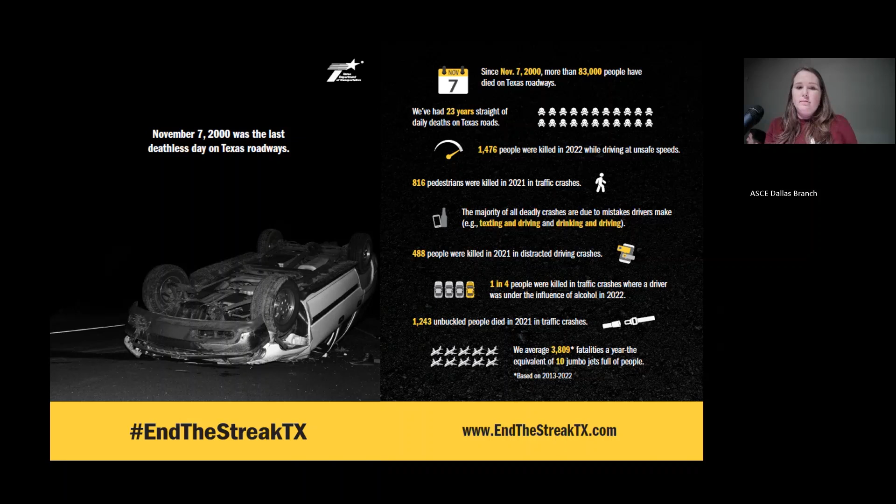So there is one person coming to our North Texas region every 3.3 minutes. So if you can imagine, this region and the area that the Dallas district covers grows substantially by the minute. So we want to make sure that we're managing all of our projects accordingly. We're getting those roads built up to handle that boost in population. Next slide.

So in the Dallas district, we have 7 different counties that we manage here at the district. We have over 900 employees, and that accounts for 11,000 lane miles of state maintained highways. So that's a lot of work to do. And that's a lot of traveled roadways that we have to not only design and construct, but we also have to maintain. Next slide.

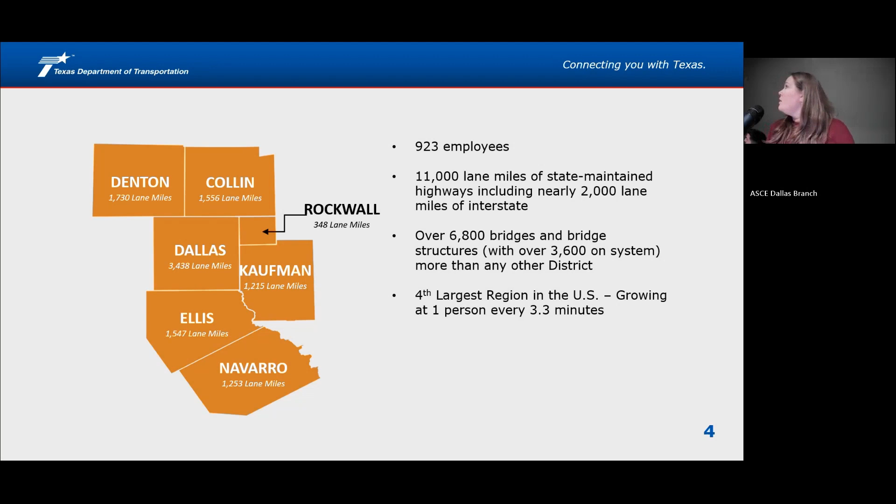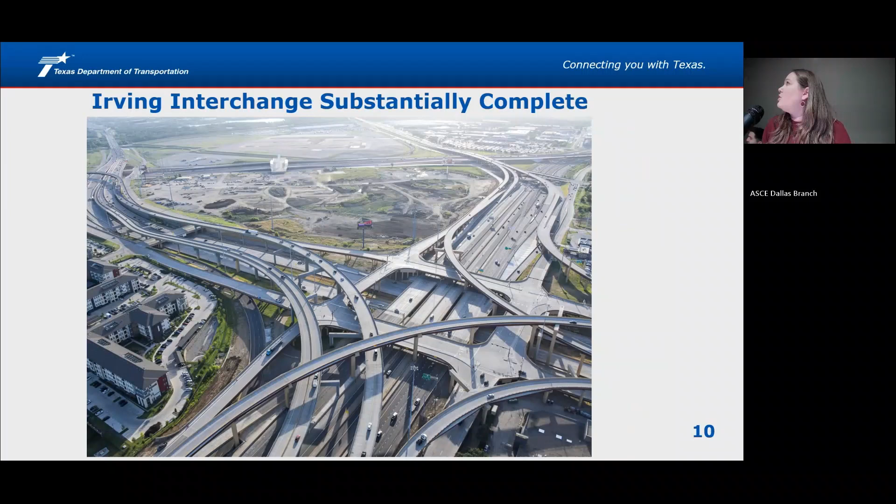We have the LBJ East project. That one's still under construction. So if you're driving down 635, you still have some construction underneath you, but we should be complete in later 25. We have the Skillman Bridge that gets built with that project. So everyone's been watching that construction going. It's been very interesting to see that bridge go up. But lots of lane miles along 635 are getting rebuilt, and we're very happy to see this one get finished soon. Next slide.

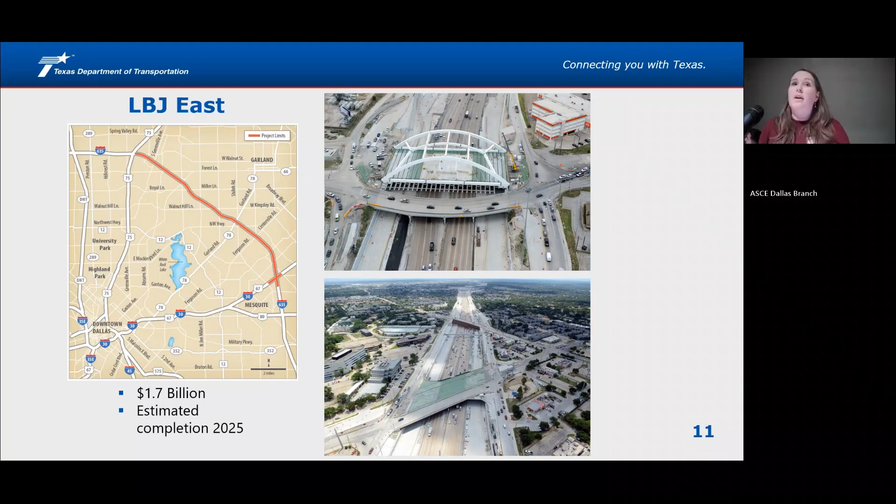We also have I-35E Phase 2 that's under construction up on the 35E corridor in Dallas County. That was a $709 million project. Construction is ongoing. We have a few more years on that one, but you'll see lots of construction going to rebuild the main lanes there, add capacity, and also rebuild those managed lanes there. Next slide.

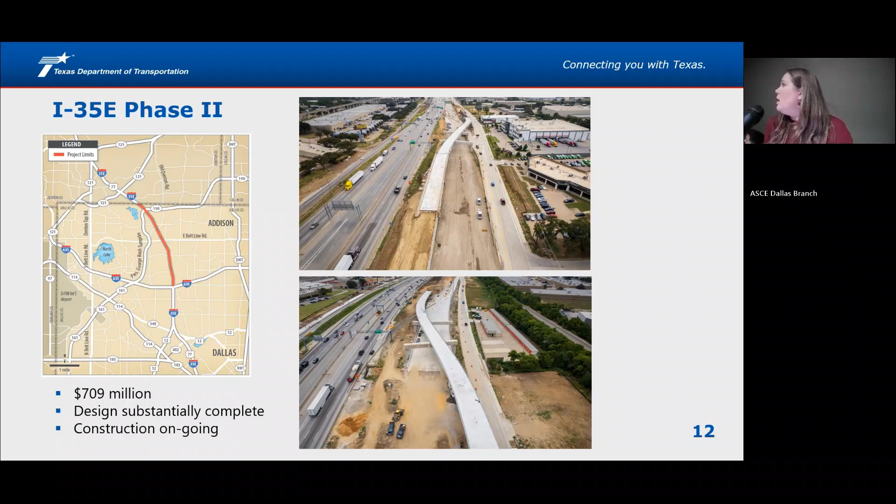SM Wright Phase 2. Construction almost complete on this one. Most everything is almost done. This is down off 45 south of Dallas. And you'll see that it is almost done. It was about a $79 million project, a really cool project, and we're happy that this one is almost complete. Next slide.

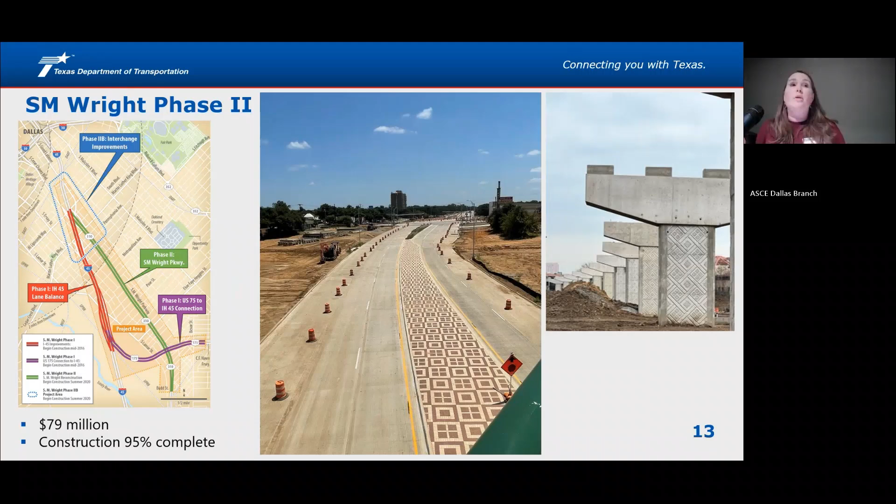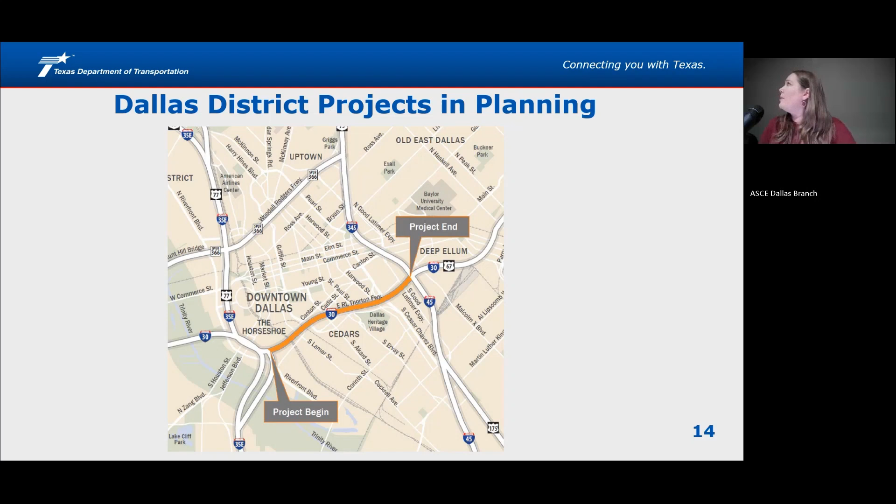So some of our projects that are still in planning phase, so still in the phase before we go to construction, if you want to go to the next slide. So if you are a consultant working for TxDOT, you're probably working on the US 380 corridor. We have broken this project up into multiple segments, and we are delivering it in PS&E. So we have finished all the schematics on the 380 corridor. We split it up into 5 different schematics. All 5 are cleared right now. 2 were EISs. They were both cleared in 2023.

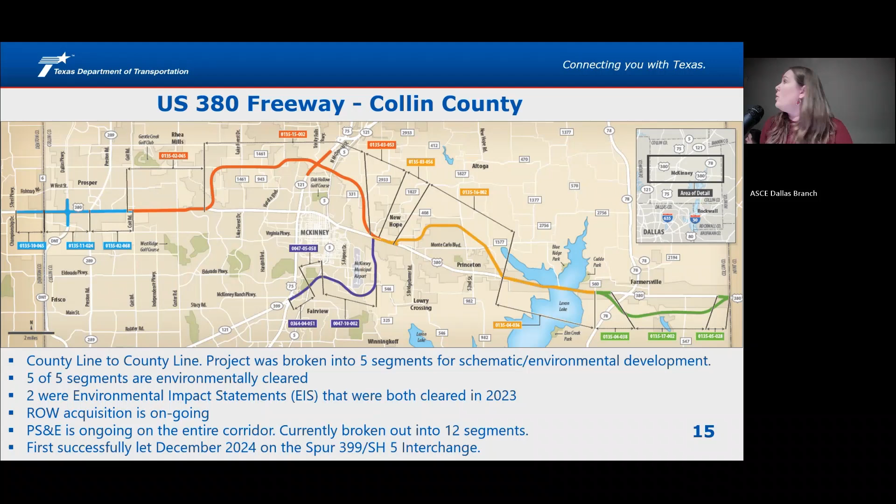Next slide. So we also are working on I-30 East Corridor in Dallas County. So this is the segment that goes from Canyon all the way to 635. We're prioritizing a piece that goes from the Canyon to Ferguson. This schematic is nearly complete, and the environmental is almost cleared.

So this one is a project that we've been working on for quite a while, but we are just in the planning phase right now. We started acquiring a little bit of right of way, but you'll see in here in a minute that we talk about the 345 project that might be leapfrogging this one in the delivery.

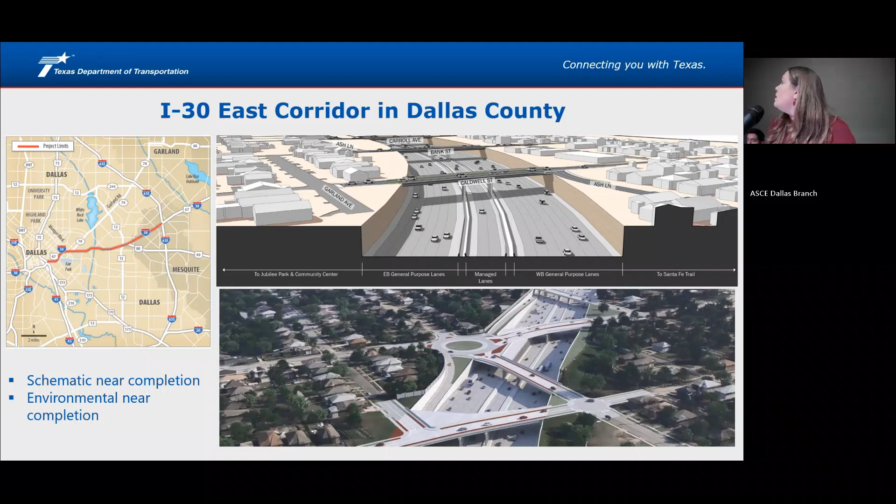Next slide. So our 345 project right now is we just held the public hearing. We held it in April. So we are working to get this project environmentally cleared in October. This one's a very important project. It rebuilds the 30 interchange at 345 and then goes all the way up to Spur 366.

We are reconstructing, I think the next slide shows a section. We're reconstructing the existing bridges that are there today and building it in a trench. So rebuilding the main lanes below, making the cross streets continue over in order to improve the operations there, as well as replace those aging bridges. I think on the next slide we have a picture.

Yeah. So here's just an image of what 345 can look like after we get finished with the project. So like I said, you'll see that 345 has been rebuilt below the cross streets, and the cross streets will now go over, which is a change from what it is today. Today, everything is up on bridge. So this one, very important. We do need quite a bit of funding for this job. So we're working on getting it environmentally cleared and then trying to obtain funding. Next slide.

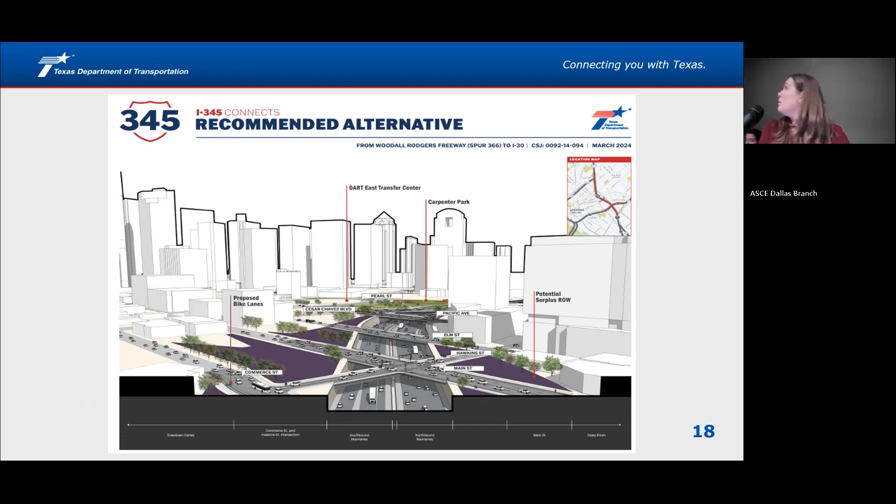And so now I'll talk about one of my projects. It's probably my second favorite project, not my favorite, but this is the Canyon project. So we're very excited to have gotten to the point we are today on this project. This project is from I-45 to I-35E, and it reconstructs the I-30 main lanes from 6 to 12 lanes and the frontage roads. So the lanes are there today, but they're in a CD system.

And so everybody who's sat in the Canyon has sat there for a little bit. We need to improve it. But it's only about 1.6 miles. So it's a really beefy part of 30 that we need to rebuild. It let in February. So we had worked for a very long time to get it to letting, and it did let for $888 million. So quite a bit of a price tag for a little section of the freeway. So next slide.

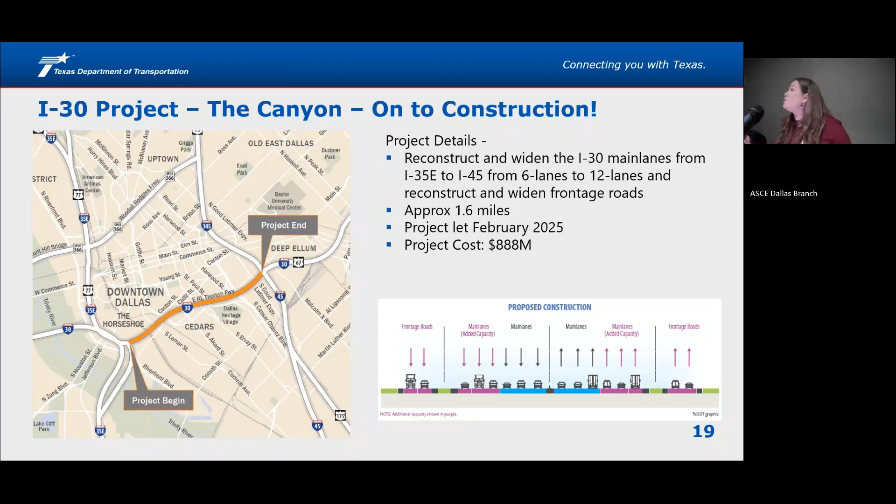Okay, so just some history on the I-30 Canyon. So we originally studied Canyon in 2005 as Project Pegasus. So that was a larger corridor study that was done back in the day. After we completed the Horseshoe Project in 2015, we started looking at how we can break out portions of Project Pegasus and deliver I-30 Canyon, because we knew we weren't going to get all of the money for everything else. So we started working on that schematic.

We approved the schematic and cleared it in December of 2020. We started that PS&E design overlapping a little bit at the end of the schematic. And then we started acquiring right-of-way. We finished right-of-way back in '23. Utilities started working as soon as we could get them to start working back in '21. And they are now clear to let to construction. And as I said, we completed design and we let it to construction in February.

Construction, we do have a construction delay on the project to allow for fabrication. So you won't see construction out probably till early '26, after we get all of those materials that are needed for construction. But as you can see, 20 years in the making, this job has been around a long time. So it did take quite a bit to get there, but we're very excited that it's here. Next slide.

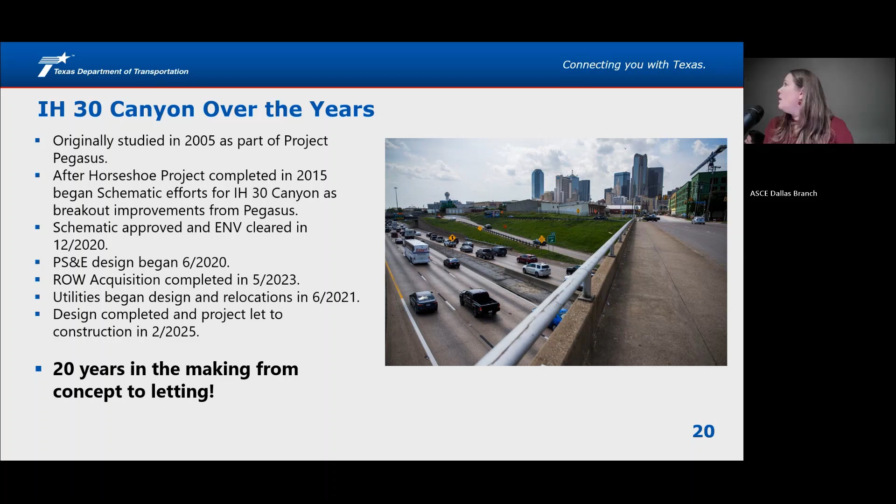All right, so one of the biggest things with the I-30 Canyon project is the railroad coordination we had to do on this job. It's one of the reasons why this job was a PS&E job and not a design-build job. The escalated risk for railroads, we needed to get that design done through the PS&E delivery.

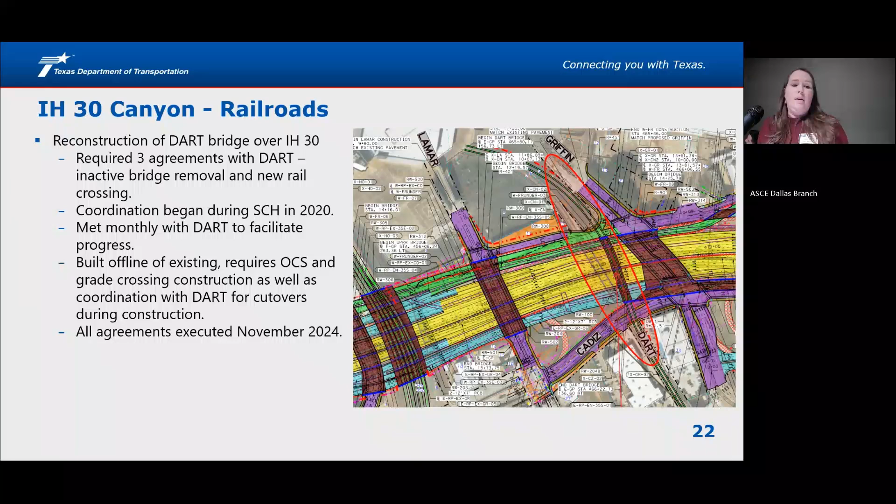And so this slide shows where we have to rebuild the UPRR bridge. So right next to Hotel Street, right now today, the railroad bridge is one bridge with Hotel Street. So if you've driven under here, you've seen it. But we started this coordination in summer of 2019. So when I tell you in a minute here when we got our agreement, that is over 5 years to talk with UP to get this agreement approved.

So it was definitely one of the bigger parts of the job and the design that we had to get approved. We had to get both track and structural submittals through UPRR to review and get them approved. We definitely met monthly with UPRR to keep that progress going. It requires the construction and use of existing Hotel Street Bridge to facilitate the shoofly. So what we do during construction is, you can't see it on the map, but Hotel Street is one bridge. So there's actually a bridge between the 2 new bridges.

And we are going to rehab Hotel Street, get the shoofly over there on Hotel, move all the track over there, and then build the new bridge. But if you can imagine, to do that, to scoot everybody over, we then have to tie in all of the railroad tracks. So over 1.5 miles length of track that we had to rebuild for tying those structures in, and lots of track work going on there.

On 12/19/2024, you'll see I know the exact date because that was a very important day that we got that railroad agreement done. I said it was a Christmas miracle. We were very happy that day when we finally got that signed. So we got it. We have been working with UP. Our area engineer is working very closely to get our construction right of entry. I think we are moving on the right track and ready to go to construction there. So next slide, I think, shows the railroad bridge.

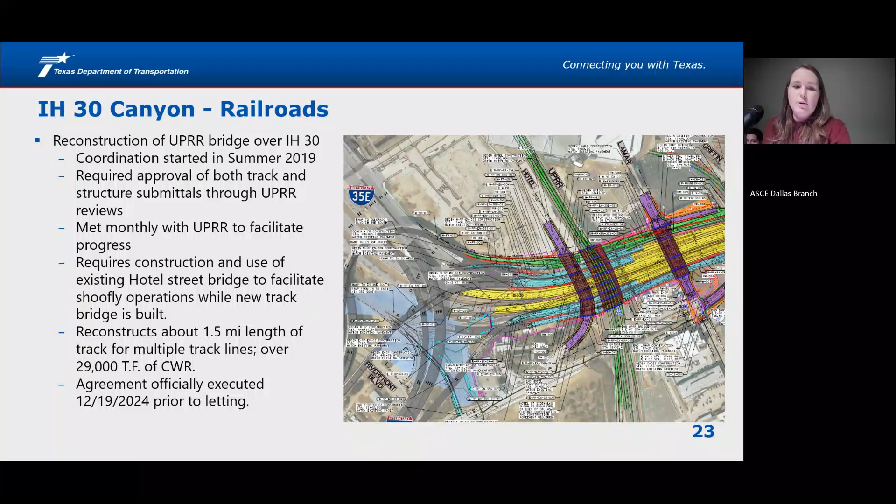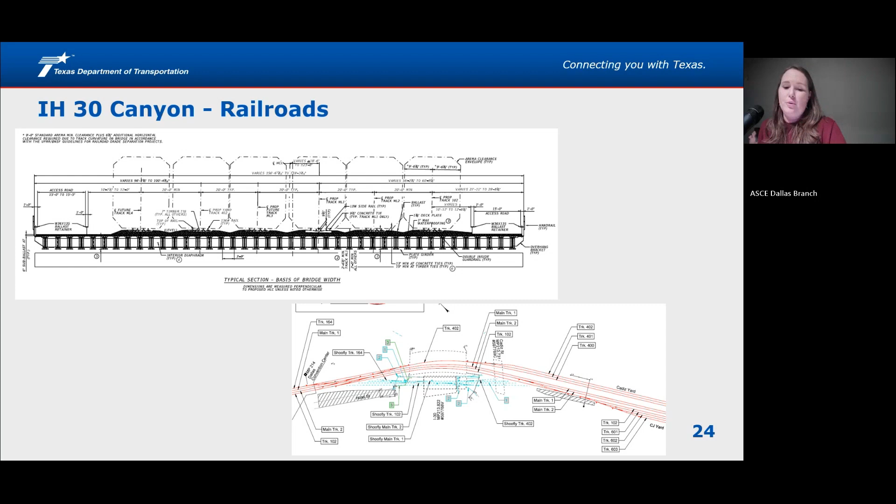Yeah, so the railroad bridge length, you'll see how large it is. It's actually wider to account for another future track if they want to come in later. So we had to account for the entire future width. So it's over 150 feet, yeah, 156 feet. And then on the bottom is all the track. So the bridge area over 30 is on the blue part. And so the amount of track we have to do is all the red, and it goes in and ties out in order to make this work for the rail bridge. Next slide.

Another big piece of coordinating this project was the local government coordination. So we do include structural accommodations for the future deck caps. We coordinated those with City of Dallas. We have executed AFAs for those. TxDOT and state funds can't be used to fund deck accommodations, so the city or local funding had to approve those.

We only include the substructure work for the wall accommodation. So if you've driven on 35E and you've seen Southern Gateway's deck, we actually constructed that cap with that project. This project will only construct the walls, so the cap will be something that comes in later. But we were able to get the accommodations in the walls now so that we wouldn't have to rebuild any of those walls later when the city wanted to have a future park.

So we have 84-inch shafts in those walls to accommodate the future loading. And we did lots of coordination with NCTCOG, the city and the stakeholders in order to incorporate those into the design. Next slide.

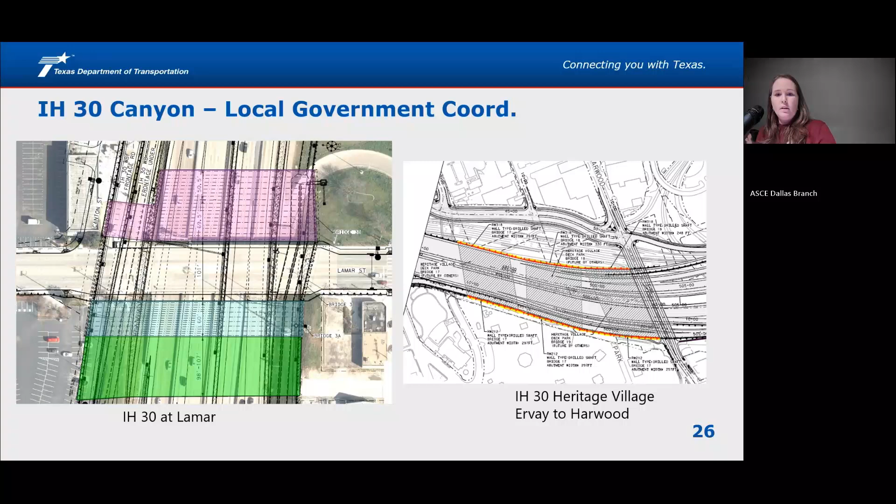So another really exciting thing that the contractor gets to work with on this project is joint bid utility work. In working with Dallas Water Utilities ahead of the project design and letting, due to the size of the relocations and the scope of what the project and relocations would need, we decided to incorporate it and allow for it to be constructed via the construction project as joint bid work.

So we have a 60-inch water line relocation at Lamar. We have a 36-inch water line at Cesar Chavez, and also lots of different minor utility relocations that have to take place for water and wastewater lines. So the contractor will be doing this as part of the construction in order to make sure those lines can get relocated. Next slide.

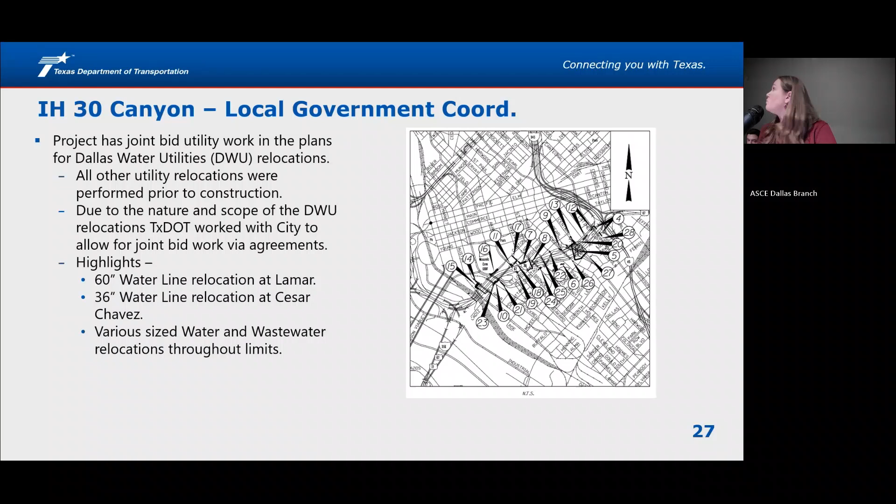As you can imagine, 30 is a very highly traveled corridor. It has 240,000 vehicles just for the existing year in traffic. So we must keep the traffic moving during our traffic control phasing. We had to maintain the existing 5 main lanes throughout construction and throughout those construction phases to limit that impact to traffic.

It also required strategic phasing of the overhead cross street bridges. We wanted to make sure that if one was closed, we could keep the one next to it open, so that everybody would have a detour route. We had provisions for keeping some of them phased. Griffin is a very highly traveled roadway, so we have that one phased. And we coordinated with city staff on those things during design.

Another thing that was important when we looked at traffic control was the deep install of the drainage structures. We have lots of shoring and lots of structures that have to be dug down very, very deep. So those had to be accounted for in our traffic control plans. Otherwise, we wouldn't be able to build them with the traffic still next to them. Next slide.

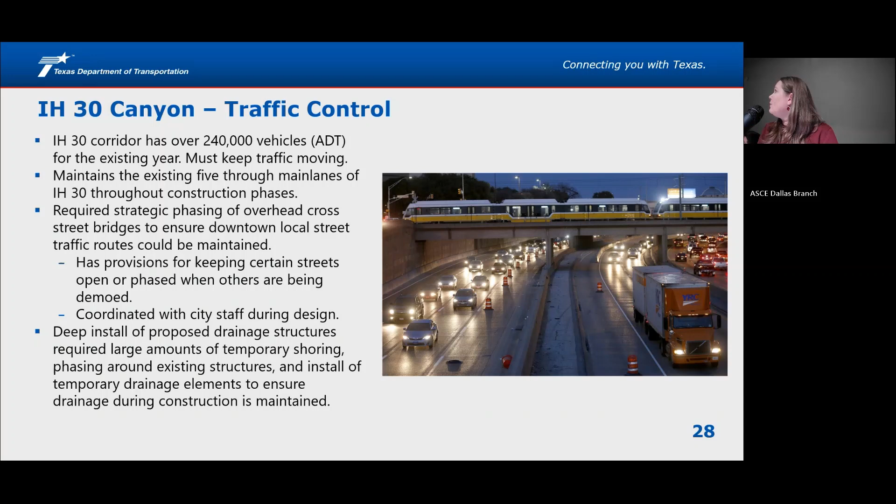So some of our lessons learned so far; we know we're going to learn many more as the fun part starts during construction. But for the design, the biggest thing about this size of a project is we need a good communication plan with our consultant partners, and redundancy. We held weekly meetings on Monday morning. We started our week off talking about Canyon, so it was a really exciting time, but it really helped us know what we needed to complete for the week and what was due towards the end of the month.

Railroad coordination: start it the second there's a railroad involved. The only thing we could control about that railroad schedule was the time that the submittals were in our court. So we really worked hard to turn those around as quick as possible.

But it's a balance. We have to make sure that when we turn that back into the railroad, it was complete. Our answers and our responses were accurate so that we didn't get it rejected again. So really, really focusing on the railroad on a project like this, if you had a similar bridge, would be a very important part.

Setting realistic expectations with stakeholders. If you look how long this job took, it took from 2000 to 2025. So it's a long time, and it's a large project. So it's not going to get done tomorrow. So we needed to make sure that everyone understands what's going to happen and when construction is going to start. It's not going to be, you're going to see the roadway built tomorrow. So really wanted to set the stage.